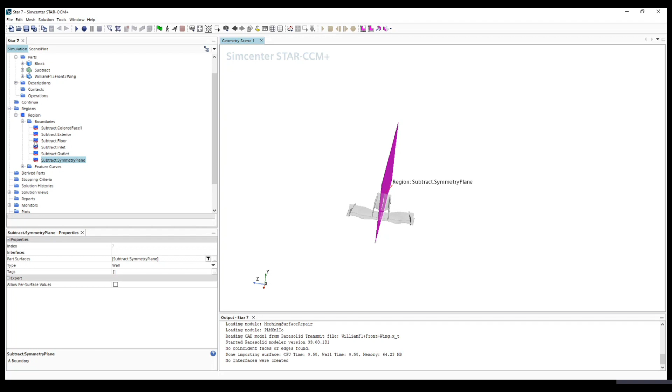click operations and right click, new, mesh, automated mesh. Okay, so we need to generate the grid within the subtract. We need to highlight the subtract and we choose surface remesher, automatic surface repair, and for the core volume mesher, we use a trimmed cell mesher. And of course, we want to resolve the boundary layer, so we need to choose prism layer mesher.

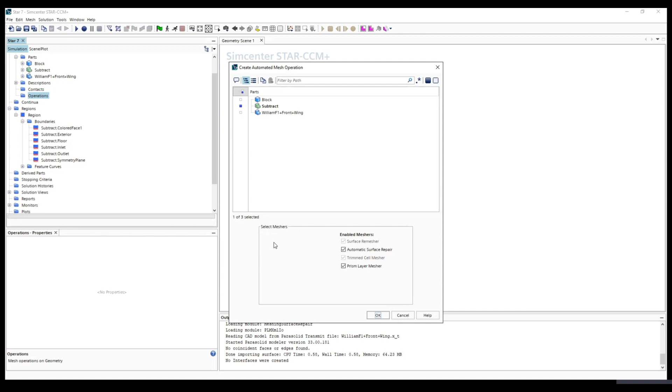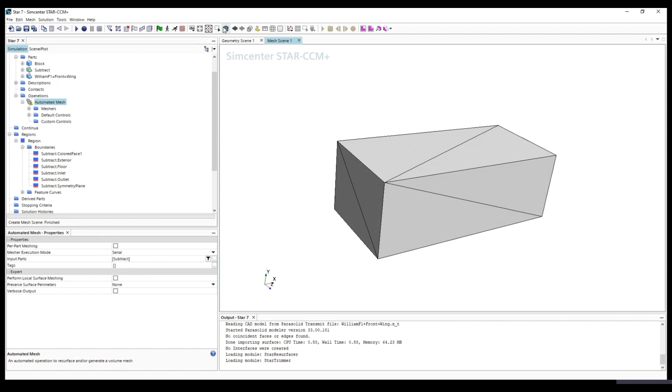We can click OK. So now we need to set up the parameters for the automated mesh. In order to visualize the mesh later, we can select the mesh and we will see. And we can also make it transparent. So you can see the existing mesh is like this. This is not good.

Okay, so what we need to do is change the base size, and the base size can be changed to, let's say, 0.5 meter here. And also we want to have the prism thickness, because in this case it's a relatively small model, and we can just use absolute.

And let's see, 0.01 and 0.01. So it's, let's say, 1 centimeter. So 1 centimeter for the boundary layer. Okay, so that's total thickness. And the number of prism layers, let's say 11. And stretching, this is quite big, so let's move it to 1.3.

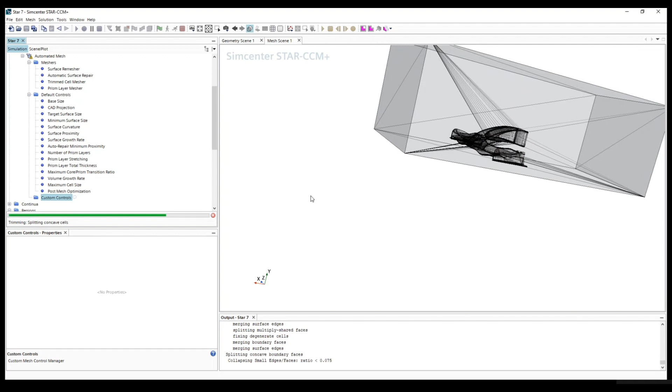And basically for now, we are ready to go. We can just click this volume mesh button. And because it's quite a big domain, we can see the mesh is like this. Okay.

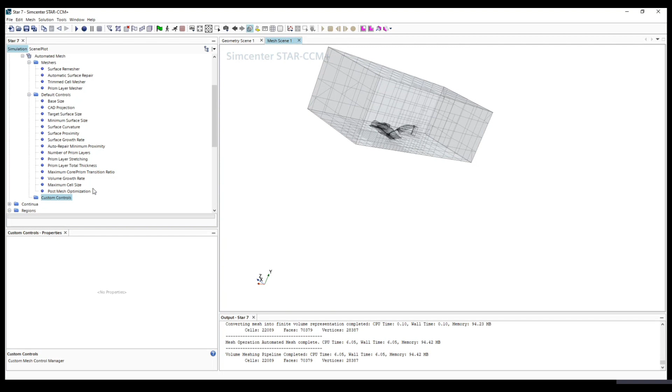So before, we could check the mesh at the internal part, for example, in the backward facing step. Now we also want to check the mesh, for example, here, at the mid plane of this wing. Then we need to derived parts, new part, section, and plane. Okay, so we want the plane cutting through the longitudinal domain.

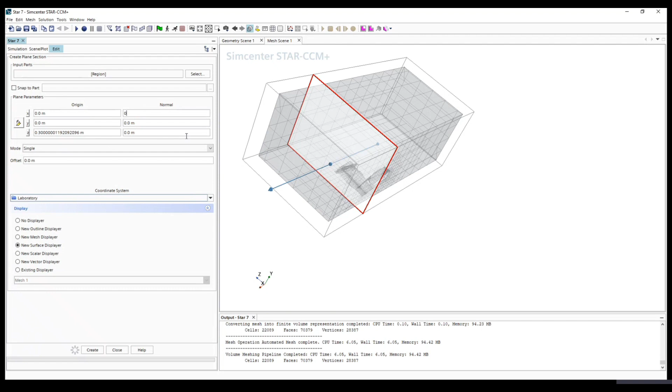So we can set the origin first of all at 0, x, y, 0, and z. We keep it like this first of all, and the plane should be normal to the z-axis. So it's like this. Okay, so apparently we want to move the plane to here, so we need to change it.

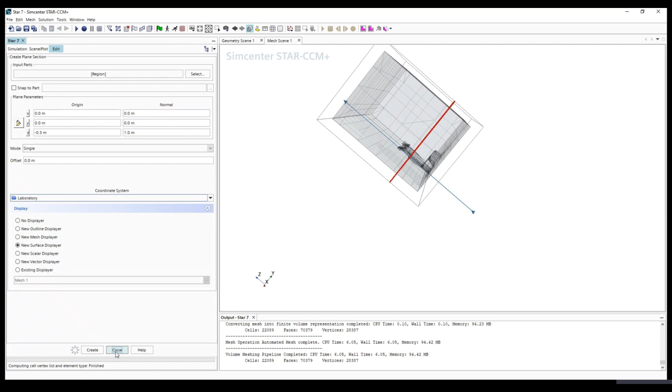And let's see, minus 0.3. Oh, sorry, we need to include the minus sign. Okay, so it's here, and we don't need to be very precise. Then we just create once, remember, then close. Okay, so now we have the derived part, this plane.

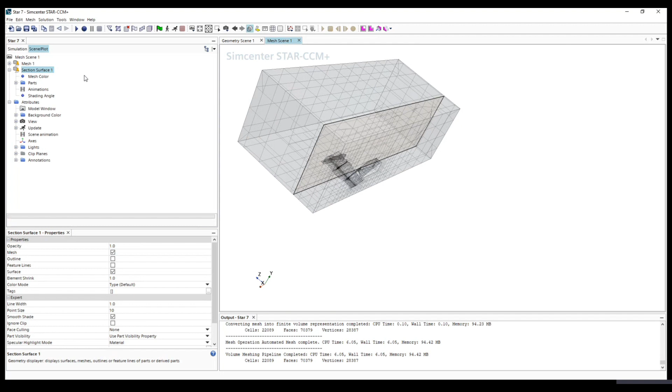So in order to see the plane, we can go to the scene plot, and the section is here, and we can enable the mesh. And to better visualize, we can disable the 3D mesh, and you will see it like this.

So this is the 2D mesh we have, and you can find it's very coarse, and it's apparently not really ideal. Okay, so we need to refine it. So in the next part, we will demonstrate how to do the mesh refinement around the front wing.